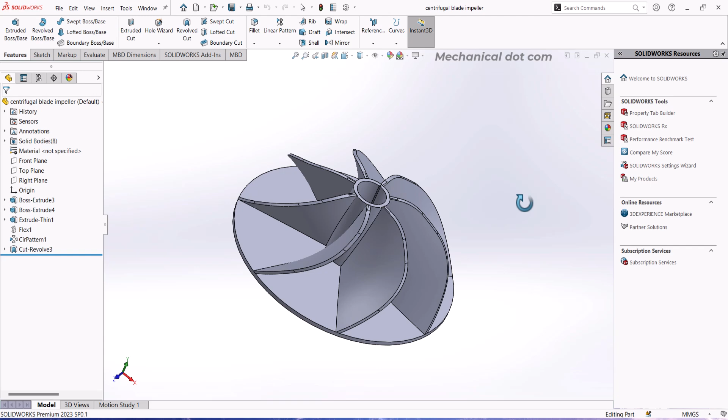In this video, we are going to create a centrifugal blade impeller. Also, in this video, you will learn some basic commands like extruded boss base, revolve cut, and also the flex command. So let's start our video.

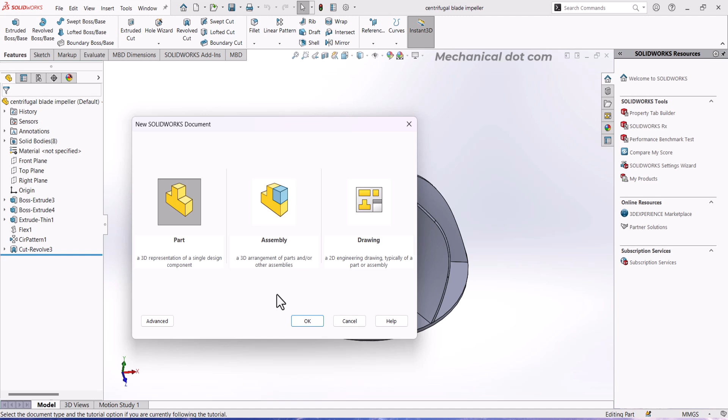First of all, select a new part file, click OK. Make sure that the unit system is MMGS system. Now select the top plane, sketch and draw a circle. Go to Smart Dimension. The dia is 300 mm.

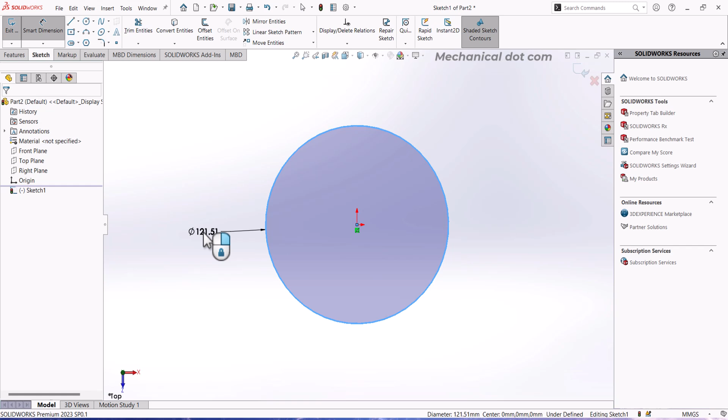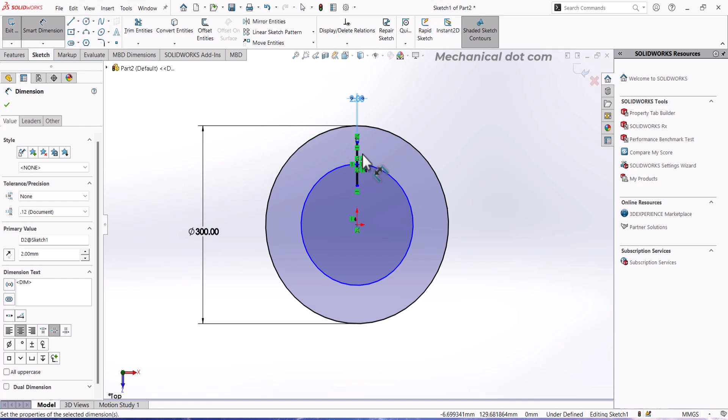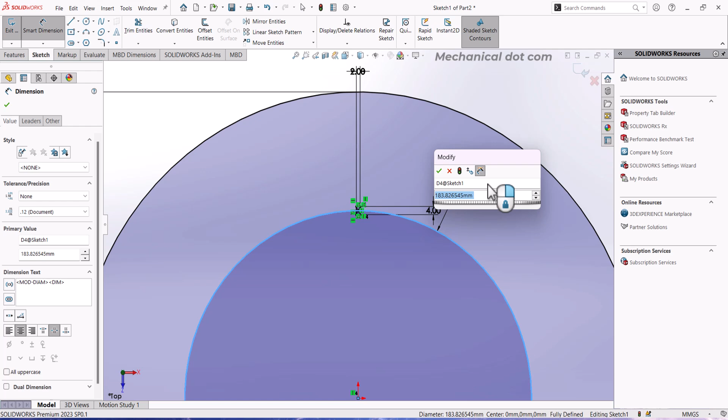Now draw another circle, also a center rectangle. Go to Smart Dimension and this length is 2 millimeter and this length is 4 millimeter. Also this dia is 40 millimeter. See, now click OK.

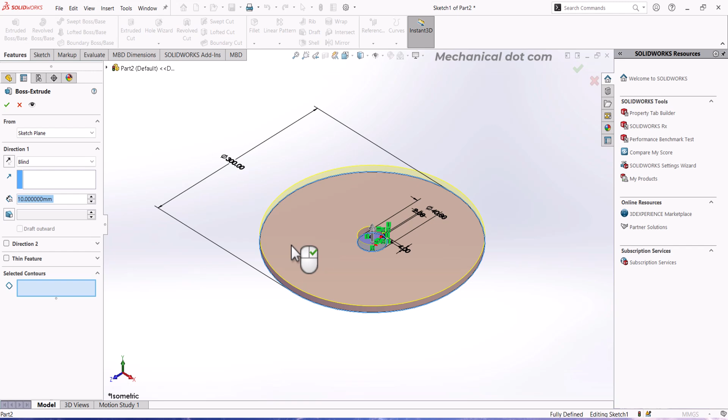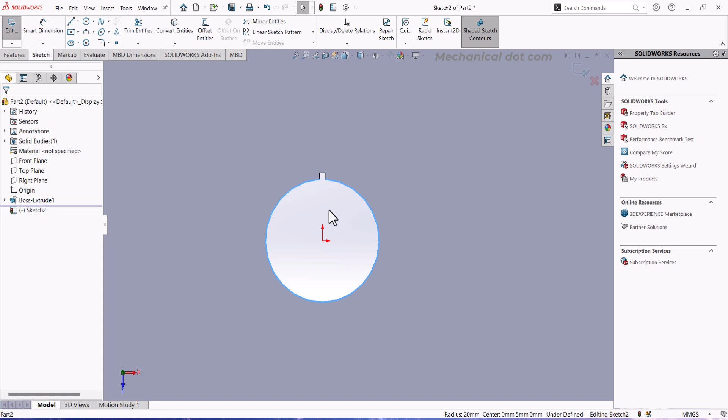Control 7. Go to Features, Extruded Boss Base and select here this face. Extrude up to 5 mm. Click OK. Again select this face, sketch, select this circle, press the control key and select all these lines. Go to convert entities.

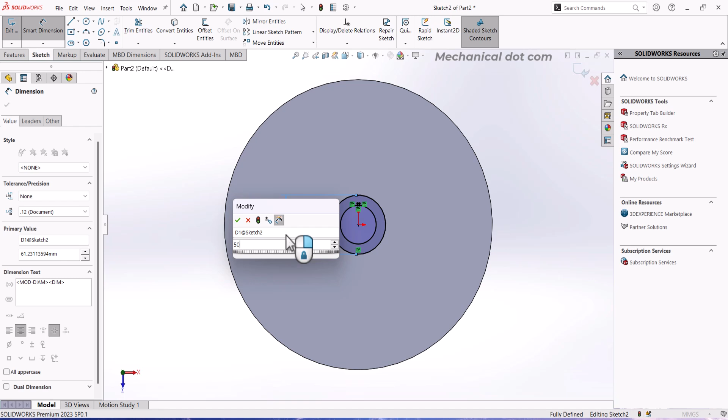Also draw one more circle. Go to smart dimension. The dia is 50 mm. Click OK. Now go to features, extruded boss base and type here 100. You can choose any length you want, maybe 120, 130, doesn't matter. Now click OK.

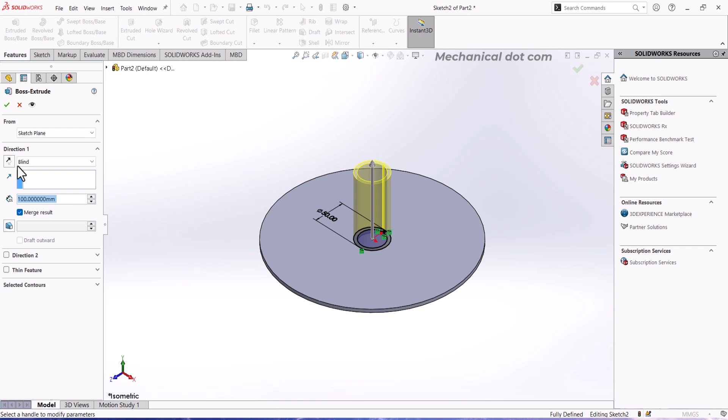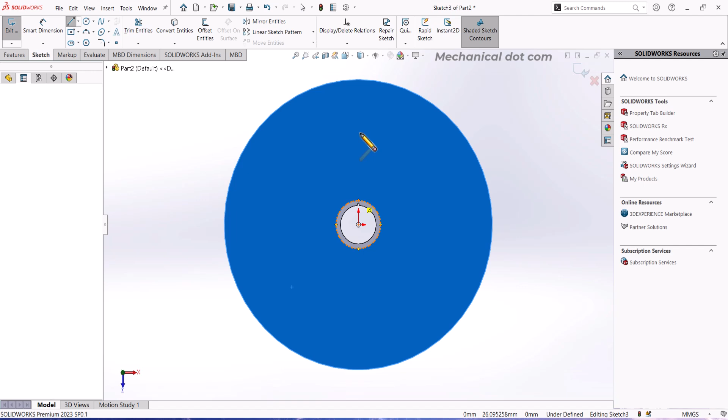Okay, now for blade parts, I will use line command. So first of all, select this face, sketch, use line command, and from this point to the top, draw a vertical line, escape. Now go to features, extruded boss base, and choose here blind and type 100 mm. Also choose direction 2 and type here 5 mm. Now click OK. Also uncheck the merge result and click OK.

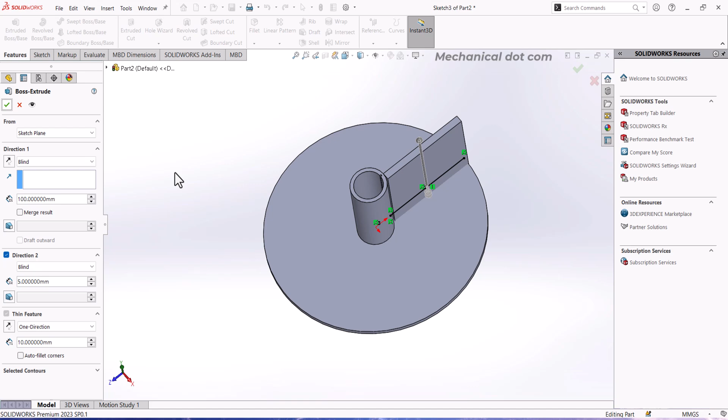See, this is not in the middle. See, this is on the single side. So we will edit this feature. Just go to edit feature and select here mid plane. Now click OK.

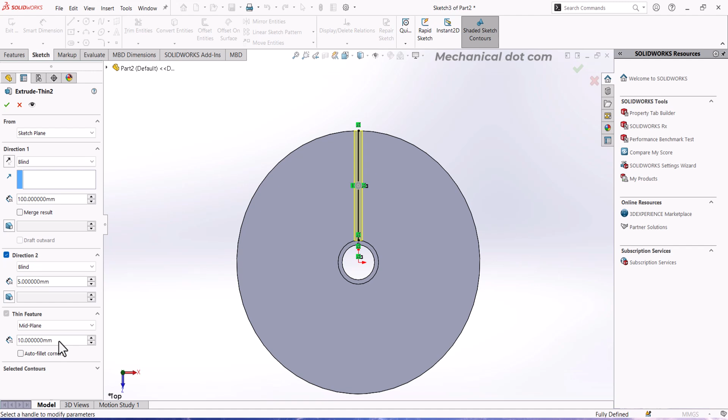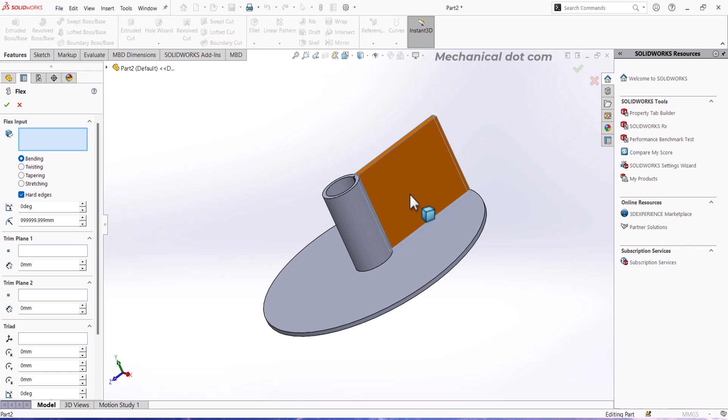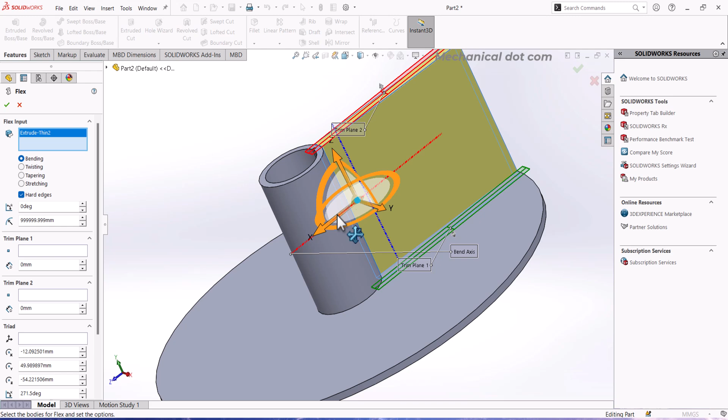Okay, now for the twisting of the blade, just go to insert, features and choose here flex. Choose this blade and move up to 90 degree. We want this x-axis on this side, so just move upward, and see, this is fully perpendicular to each other. Now drag this point up to the center of this cylinder, anywhere in the center. I think this is okay.

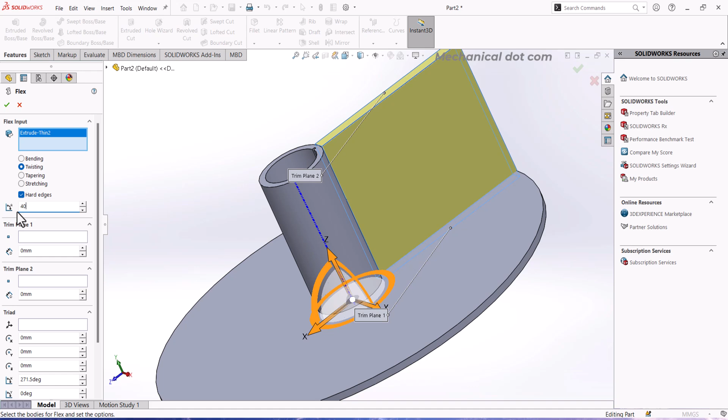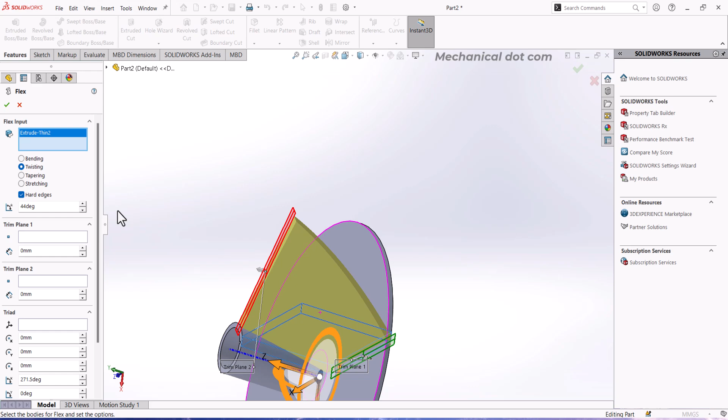Now choose here 0 in the x-axis, also in the y-axis 0 millimeter, and also in the z-axis 0 millimeter. Now choose here twisting and select here 40 degree. You can increase or decrease as you like. I will increase some. We will just keep on 44. See, this is now looking good. Fit to area. See, now click OK.

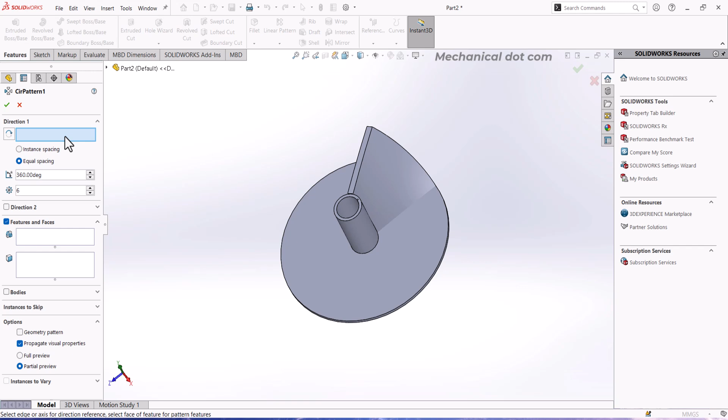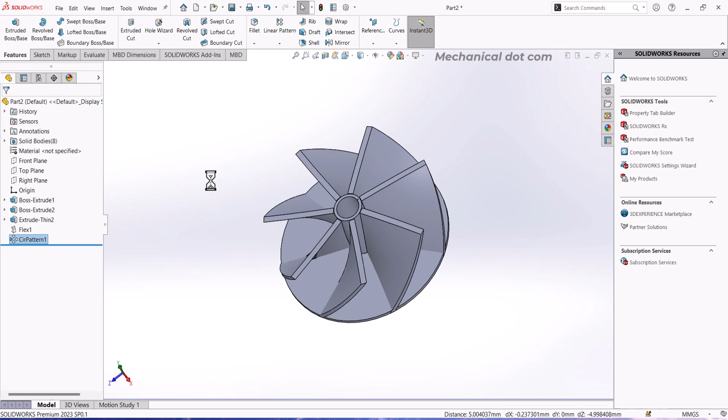Now see, okay. Now go to circular pattern. Select here the whole of this cylinder and check the bodies and select here this plate. We want 7, so type here 7. Click OK. See, Control 7. Okay, now for giving the cut, choose here front plane and sketch, and choose here wireframe.

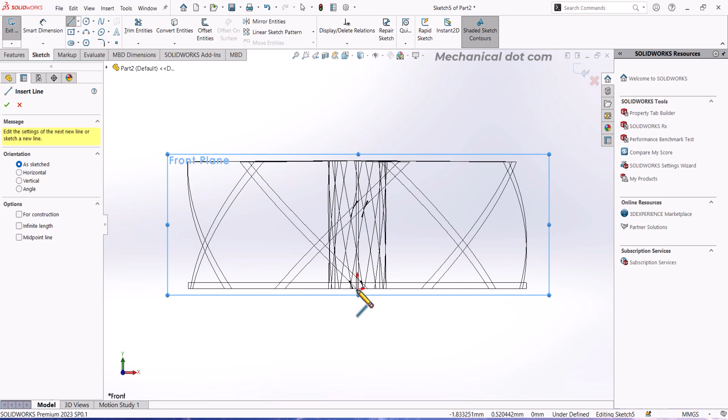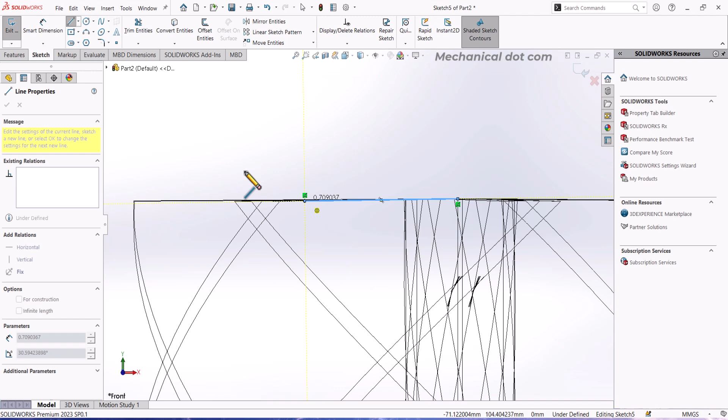See, now choose line command, and from the center, see, this is its center. First see this point, and now see, this is its other point. Draw lines like this. You can zoom it like this. Now zoom out like this. Again zoom out this point, and now like this.

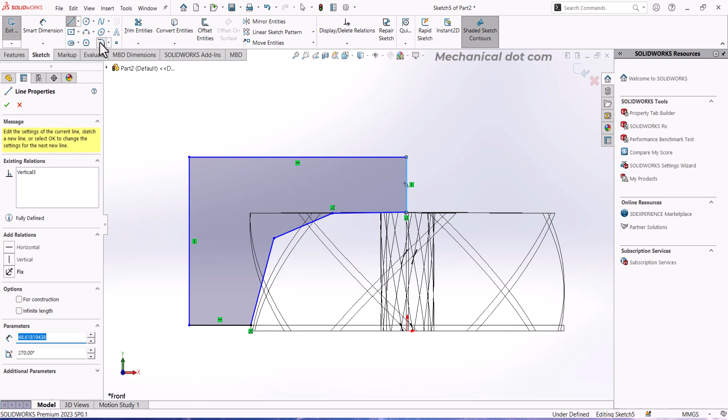Now go to sketch fillet. This is very important. Select this line, press the control key and select this line. Also this line and this line. See, you can increase the radius up to 40 or I think 50. This is your own choice. You can select whether 55, 60. This is your own choice.

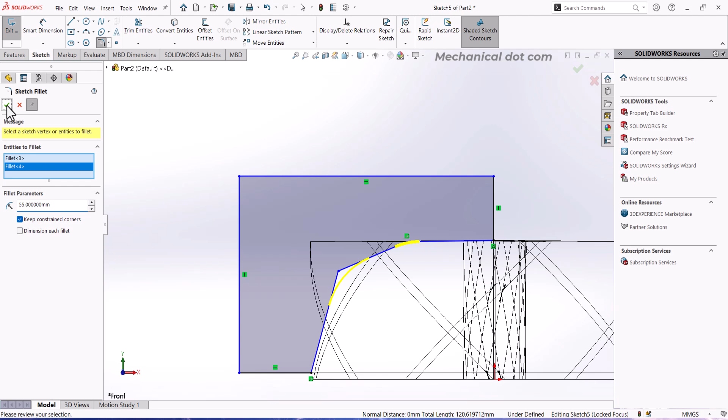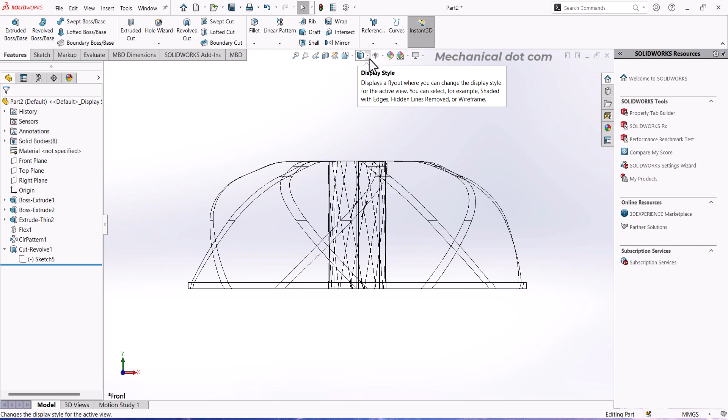Click OK. Go to features and choose here revolve cut, and just select this single line. Okay, see, now click OK. Now change the view. See, our part is complete.